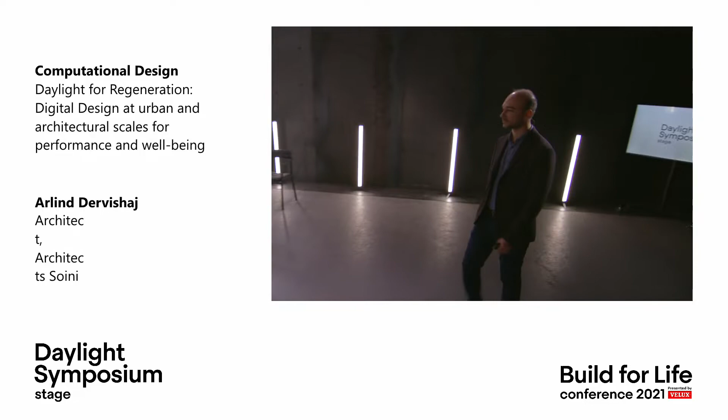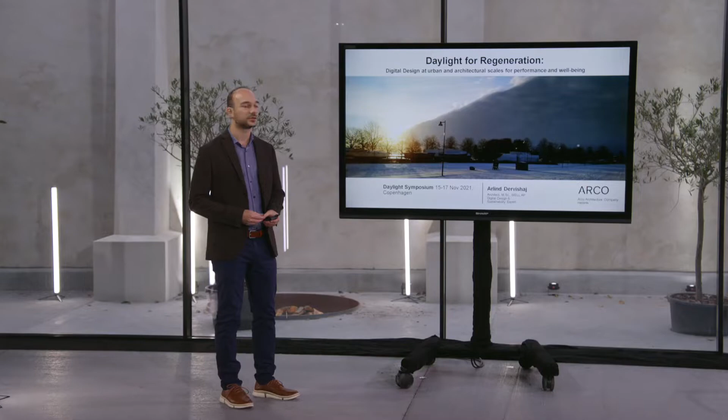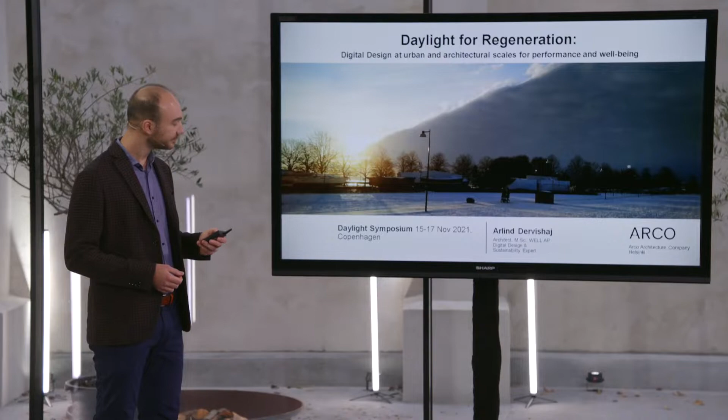My presentation today will be on daylight for regeneration at both urban and architectural scales, also in relation to the European daylight standard. And initially, I will make a brief introduction of who we are and also try to answer what is the role of daylight in this new paradigm of sustainability called regeneration.

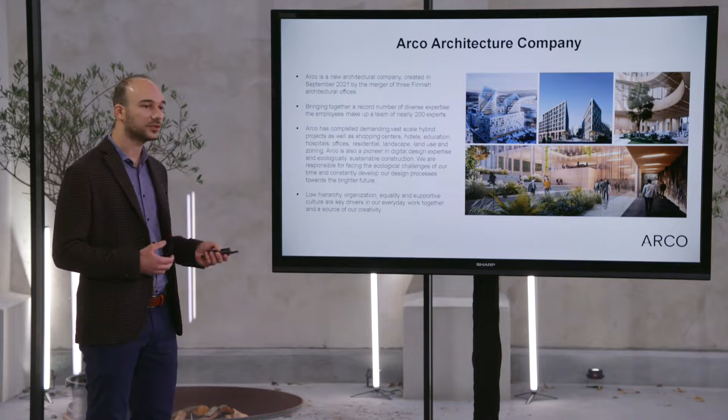So we are Arco Architecture Company. It's a newly established firm in Helsinki, Finland, from the merger of 3 firms. And we are bringing together around 200 experts in building design, landscape, and other fields. And we have completed demanding hybrid projects, shopping centers, hospitality, education, residential, and so on. And also equality and supportive culture are part of our driving values.

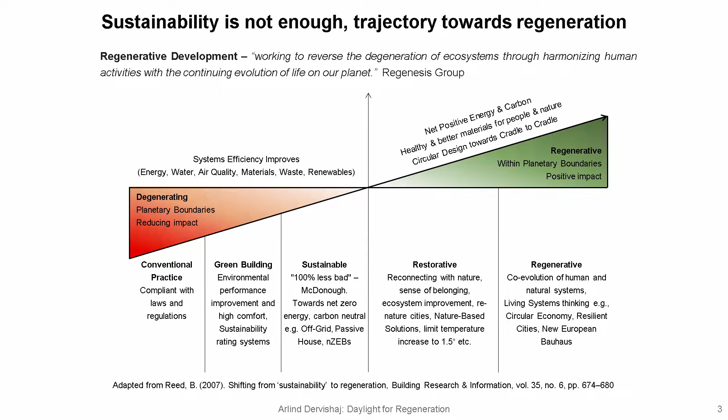And so the next step is restorative, reconnecting with places, with nature, have a sense of belonging. And when we think of nature-based solutions, or when we think of trying to limit climate change to 1.5 degrees, we can think of them as the first steps towards regeneration, towards having a positive influence in planetary boundaries, not degenerating, but regenerating them. And regeneration actually means sustaining life itself. So after 10 years, a new development may come that may undo the good. So we need to be part of nature and be part of this web of life that we are all connected.

In terms of building design, it means designing buildings with healthy and clean materials for people and the planet, non-toxic, and also try to make these elements go back to technical or biological nutrient flows. And this is not only a technical problem, it's also a cultural shift that we need to do. And also the new European Bauhaus can be an opportunity. So it requires whole systems and living systems thinking.

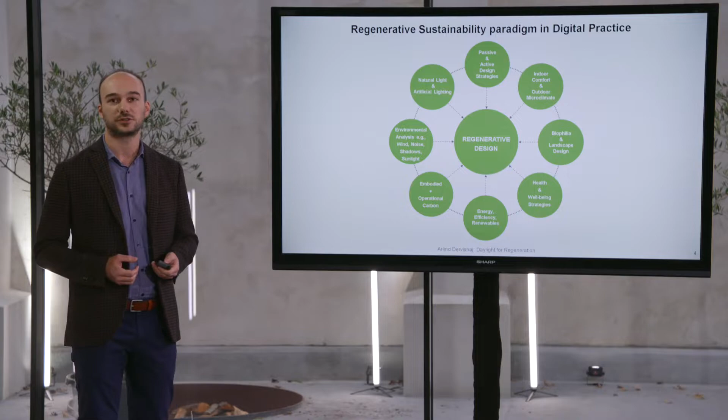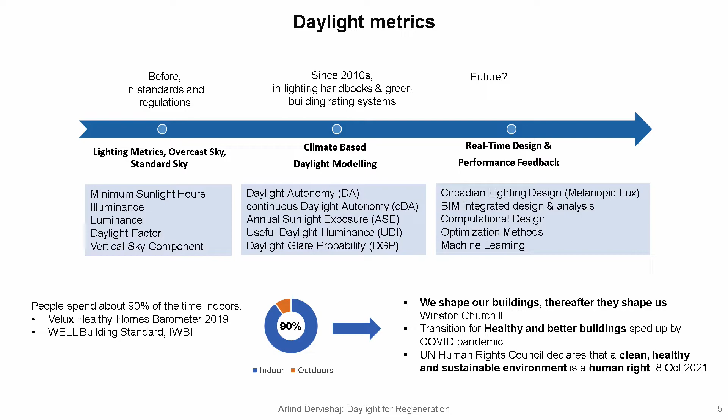And we know that we spend 90% of the time indoors, and the famous quote of Churchill, that we shape our buildings and afterwards they shape us. And there's also history when the House of Commons was to be rebuilt. And it was decided to rebuild it in the previous shape, rectangular, and not go in a new shape, oval, horseshoe, because that's how British democracy was shaped.

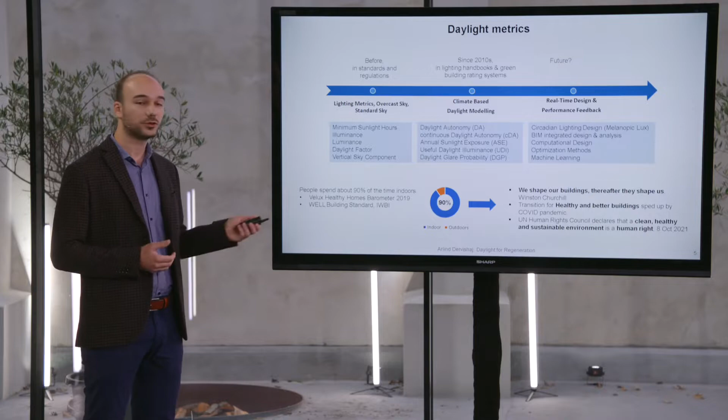And also the transition for healthy buildings, I believe, is being sped up by the COVID pandemic, that we are hopefully going out of. And the Human Rights Council just a month ago declared that a clean and healthy environment should be a human right.

So when it comes to the urban scale, we can design using daylight rules of thumb, or we can do that in a much faster way, like I'm showing in a project for the Housing Fund in Slovenia, using the urban modeling interface. And daylight needs to come in the beginning because it depends on climate and depends on the context, natural or built, and afterwards what we do inside the building. So in this way, we can also understand the impact in our design, but also the influence that we have on the surrounding as responsible designers.

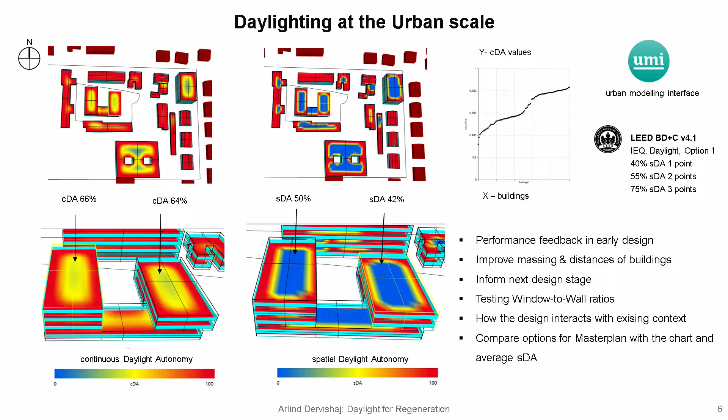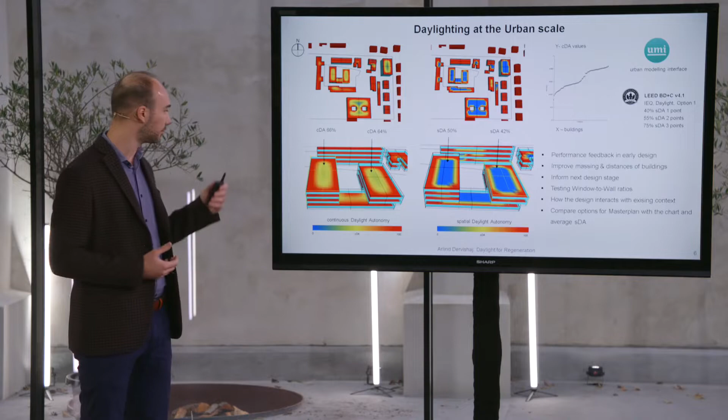And we can do that using the chart that you can see, on the one side showing the buildings and on the y-axis showing the performance of continuous or spatial daylight autonomy. And so we can test window-to-wall ratios, see how the design interacts, and also maybe for a master plan have the whole average spatial daylight autonomy for the whole buildings and track how our design options are going forward.

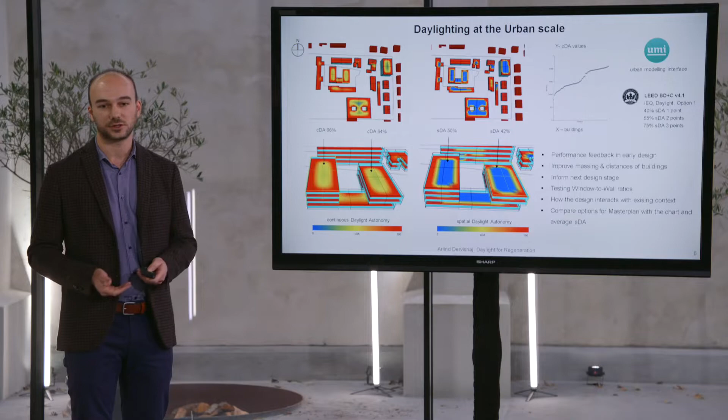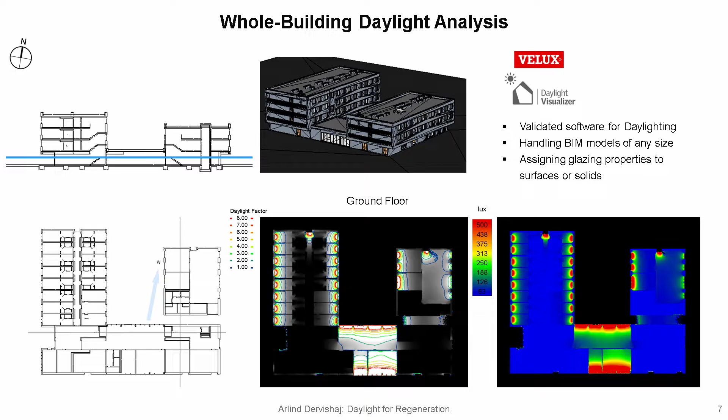And then when we go to whole building daylight analysis, we really need to know what we're doing and have results that we can trust. So using validated software like VELUX Daylight Visualizer that can also handle large BIM models is important. And also assigning glazing properties: BIM models have technical issues. They have solids, but for daylight we need only one single surface, but it's kind of solved in the software.

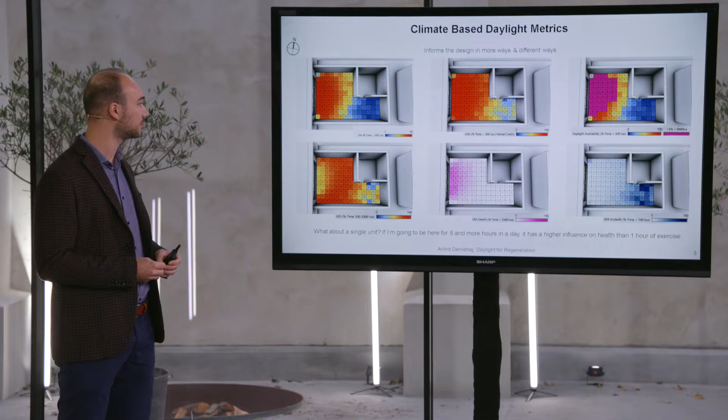And so then, maybe if it's a single repetitive unit, we can use that for more analysis. So does it make sense to use daylight metrics for one single unit? My point of view is that it does, because if you're going to stay there for 8 hours or more in a day, it has a bigger impact on our health than just 1 hour of exercise indoors or outdoors.

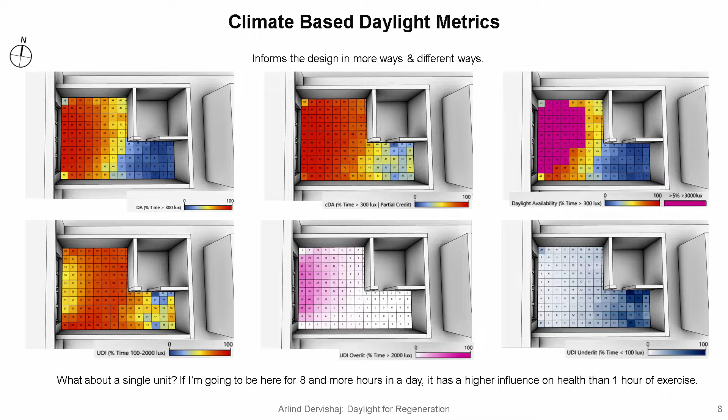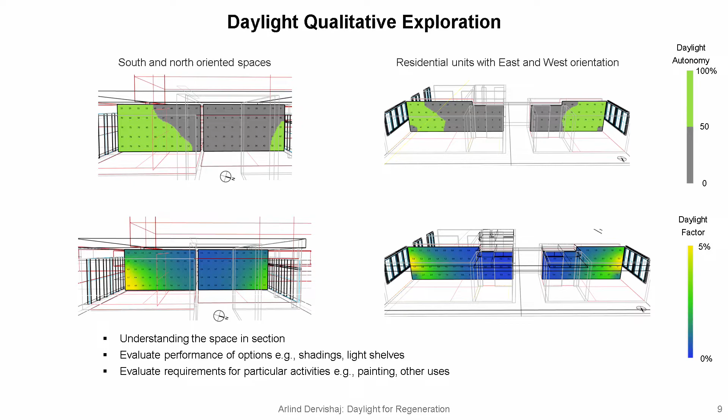We've had for many years now something called level of development or level of definition in the UK when working with building information modeling methodology and management. In Europe, this is kind of a surpassed approach. We have a new standard called level of information need. And it's different. In the previous UK standard, we would have levels from 1 to 7 relating geometry and information to the BIM models. This was too generic an approach for the purpose, and also not good for building performance simulation.

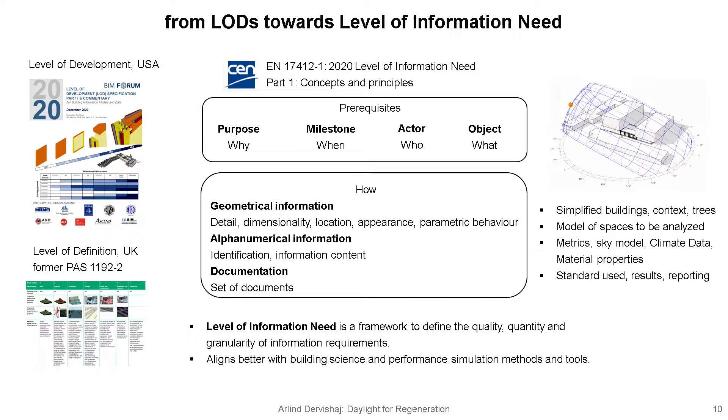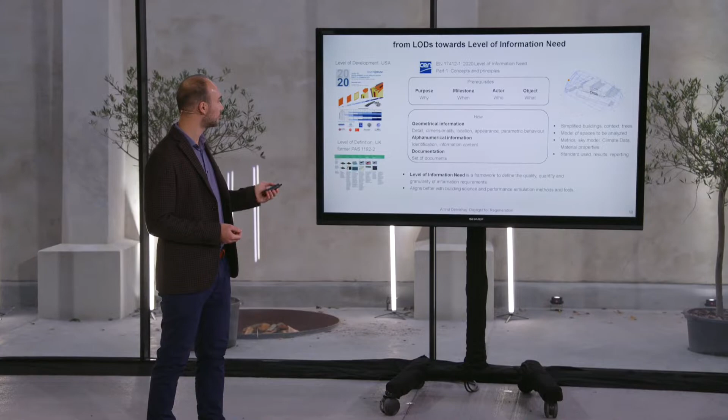This new level of information need starts with the purpose: what do we need to specify, who will be doing it, and what information is to be produced. And it has 3 parts: geometrical, alphanumerical, and documentation. So how are we going to communicate the results?

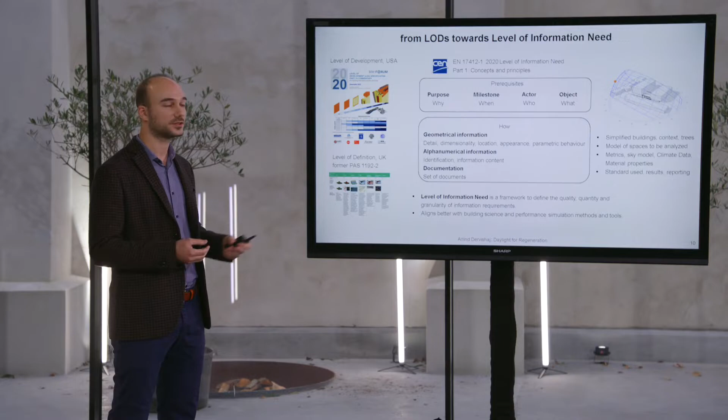I'm just showing a simple model. We need a more detailed model of the space, but a larger context that is more generic, not so detailed, for faster simulations. And also to choose the metrics, the sky model, climate data, materials. This new framework to define the quality and quantity of information requirements aligns much better with building science and performance simulations.

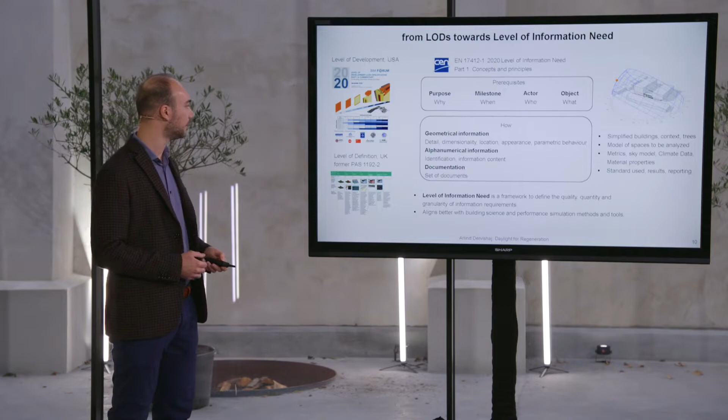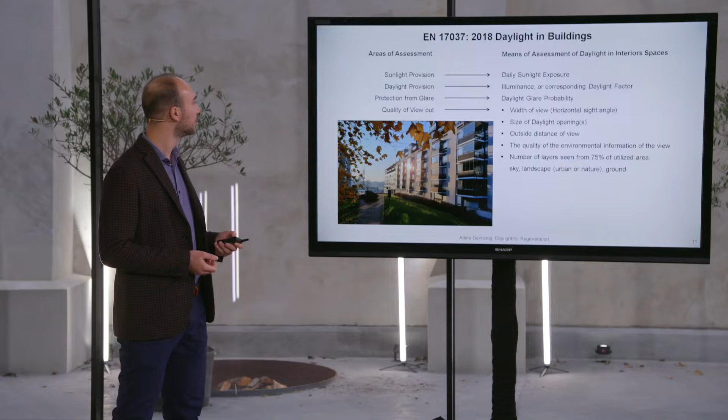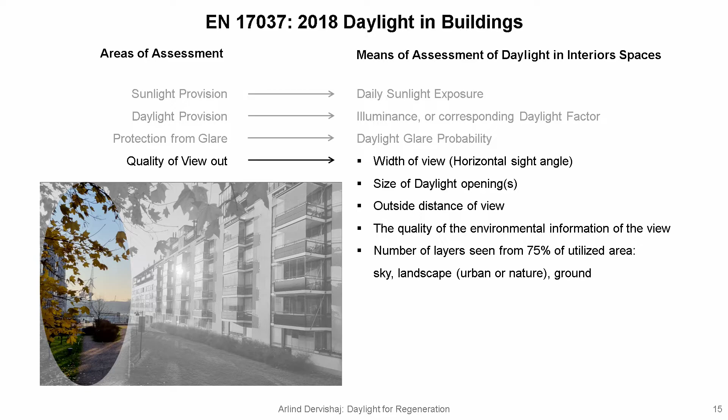And now I want to present some new ways of using the European daylight standard, building on top of it. It's good that the standard takes a very holistic approach. Sunlight provision is based on daily sunlight exposure. Daylight provision in the interior is based on illuminance or the corresponding daylight factor. Glare uses daylight glare probability, and quality of view out is assessed in different ways, like width of view, outside distance, quality of information, and the number of layers seen.

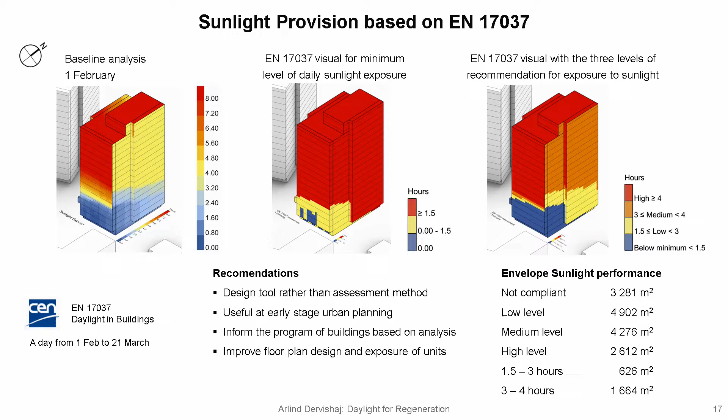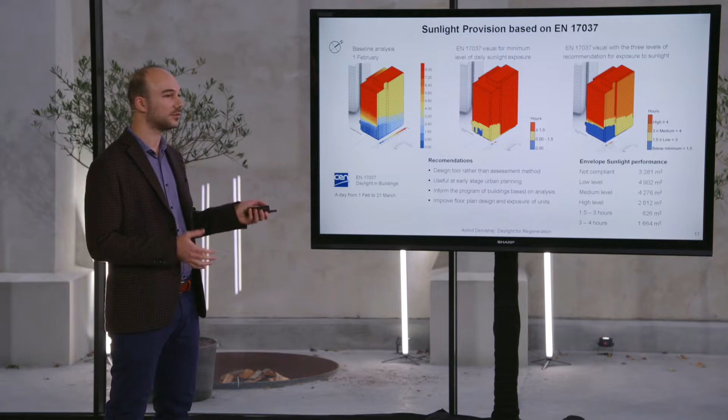At the same time, we can extract the area of the facade, so the envelope performance for each level of the standard, and maybe turn it into a percentage, because we don't need data for the sake of data, we need to actually improve our designs. So using the standard as a design tool rather than an assessment method is useful in early stages, thinking not just about exposure, but maybe organizing units on 2 levels, providing higher levels, or removing facades and working with the massing and so on.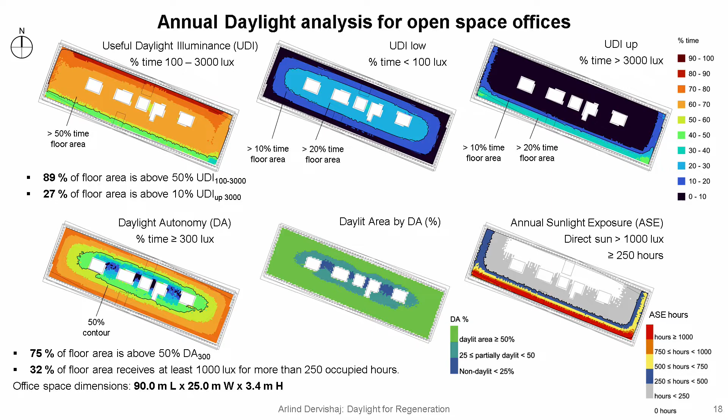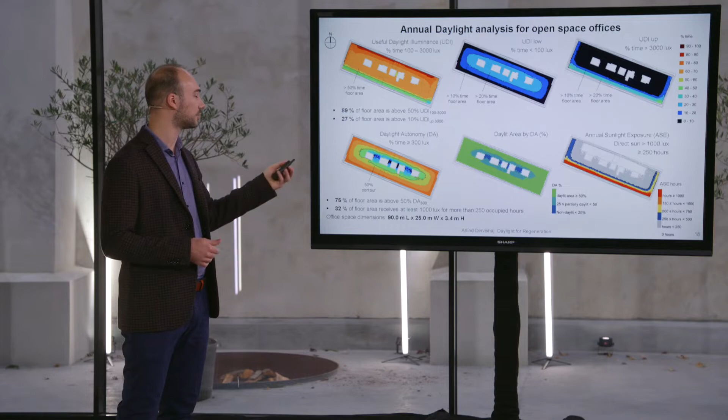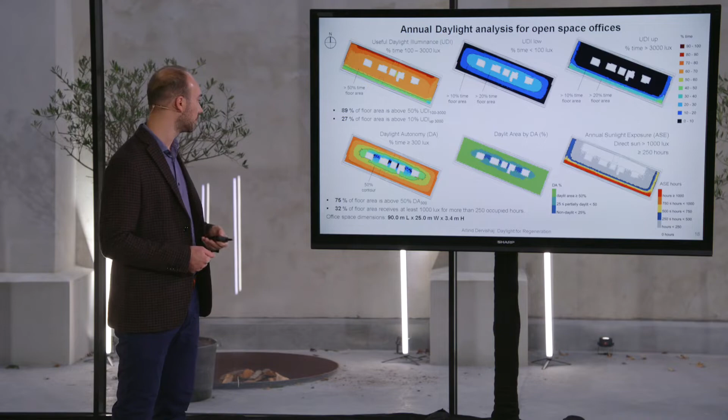On the top there is the useful daylight illuminance, a very good metric in the sense that we get 3 metrics: the useful range, the low, and the upper. When we use daylight autonomy, because it's only for daylight sufficiency, we also have to use annual sunlight exposure. We can see that the 10% of time contour lines of UDI above 3,000 lux are comparable with 250 hours of ASE, and 20% of time of UDI upper is comparable with more than 1,000 hours of annual sunlight exposure. So maybe we wouldn't need it, and it's also better for parametric studies and generative design.

And then it was interesting to run the daylight factor and also the illuminance with the second method of the standard, using daylight hours, not occupied hours anymore. So we can see that the design is not compliant with the values for Finland.

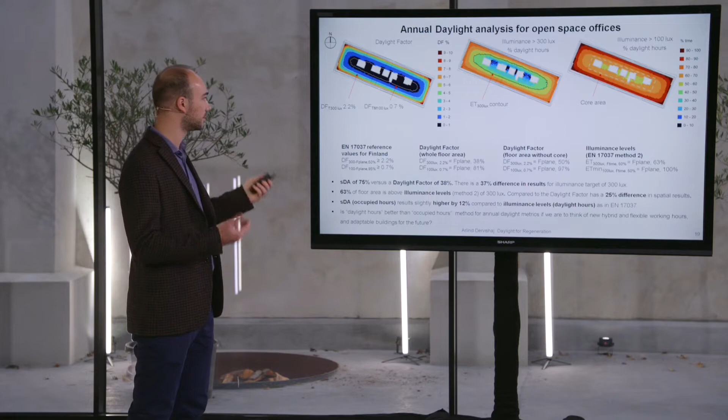If we use the whole floor area, only if we remove the core area that we see highlighted in the third image, the design is compliant. And if we use daylight hours with illuminance, still the design is compliant.

And since these metrics are computed spatially, we can see that there is a 37% difference in results for the spatial daylight autonomy and the daylight factor target of 300 lux. And with illuminance levels, we have a 25% difference with the daylight factor, and between using the illuminance levels of the standard and the SDA, there's a 12% difference. So it's not the same using occupied hours and using actual daylight hours.

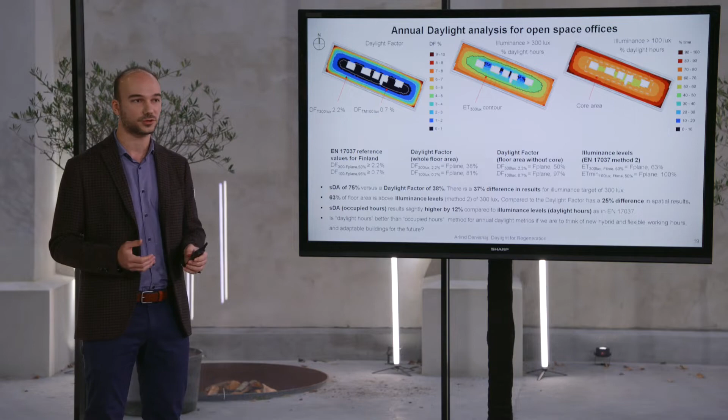And my question is, is it better to use occupied hours or daylight hours? There are some cases where maybe we would need occupied hours from a certain range, but daylight hours has the advantage because first it is based on natural provision of daylight, and second, our buildings are becoming more flexible, so we are not at the office all the time. We are working with flexible hours, and that changes maybe also how we should evaluate and understand the performance of our buildings.

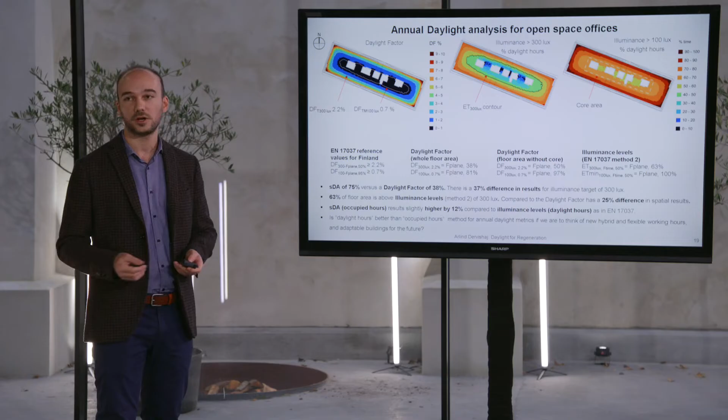Like we saw previously, with the daylight factor, we would think the design is not doing well, and we would have to provide a higher window-to-wall ratio, which will also increase energy requirements for the building. But in reality, a climate-based approach is much more accurate, even for a Nordic climate, where we think that maybe the daylight factor is still a valid approach, when in reality both methods, the American way in LEED or WELL and the European illuminance levels, give different results.

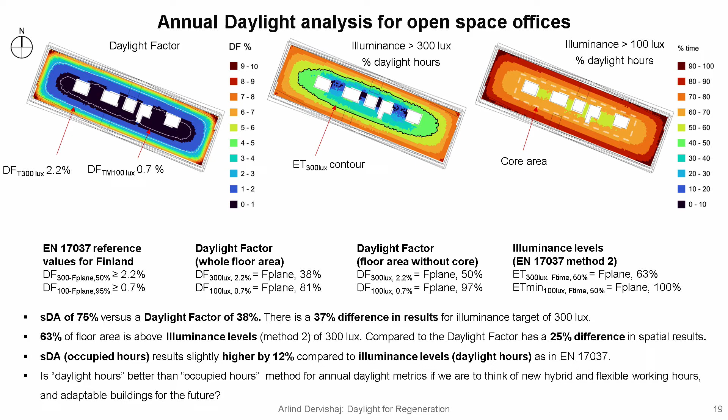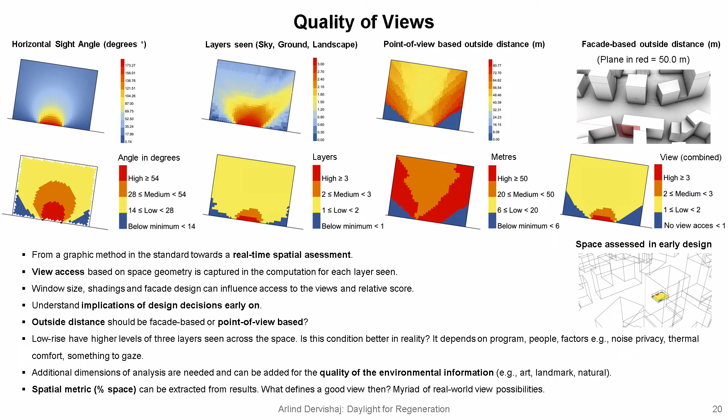Back to the slide. So, the limitation of metrics. The quality of view depends also on other factors: noise, privacy, thermal comfort, something to gaze at. So we need to be aware of the limitations that the metrics have. Also, the standard talks about the quality of environmental information, but this is not computed. We can do that very easily with computational tools, adding things that would reduce the score or elements that would increase the score, for example, art, landmarks, or natural values.

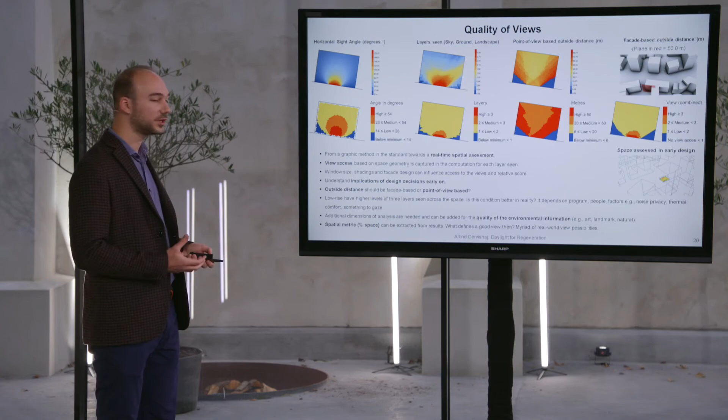And we can also turn it into a spatial metric, the percentage of space, but it's very hard to say what is good then, because we have a myriad of real-world possibilities when it comes to views. So, to conclude, daylight is a complex task, and we need the right level of information for the model, to run analysis, and also to communicate our results.

And we need computational thinking and tools based on our design intent, and we can build these things ourselves. This may not come from commercial software. The standard has been out for 2 years, and there's no commercial software that can do many of the things that I presented today, and also the other speakers.

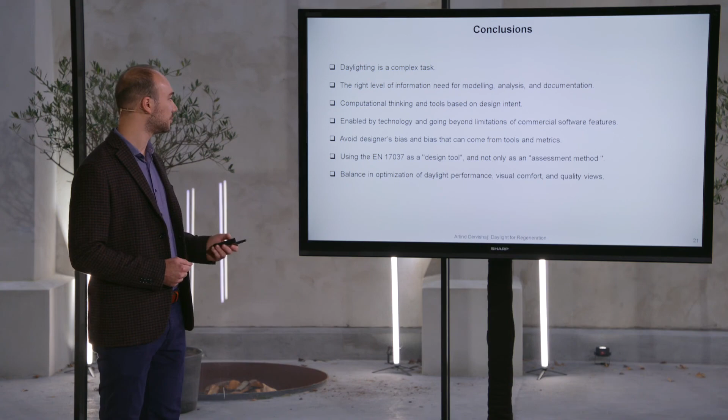And we need to be enabled by technology and go beyond limitations, avoid our own bias and the bias of tools, and use the standard EN 17037 as a design tool rather than an assessment method, and balance the optimization of daylight performance, comfort, and quality views.